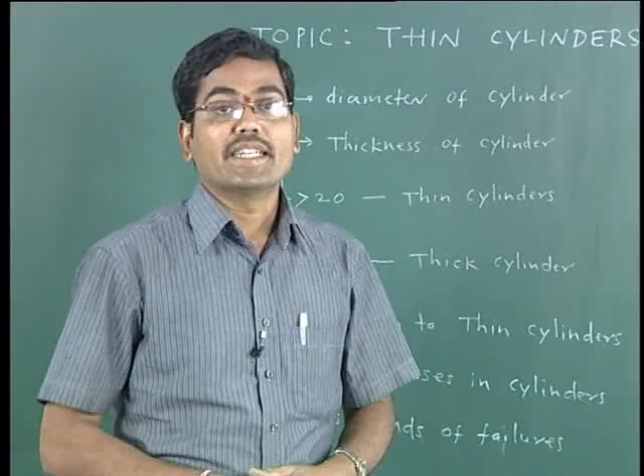Depending upon the ratio between the diameter of the cylinder and the thickness of the cylinder, we can categorize cylinders into two types: thin cylinder and thick cylinder. Suppose D is the diameter of the cylinder and T is the thickness. If the ratio between diameter and thickness is greater than 20, it comes under thin cylinder. If the ratio is less than 20, it is a thick cylinder.

Suppose there is a cylinder having a diameter of 200 mm and a thickness of 5 mm. What is the ratio of D by T? D by T is equal to 200 by 5, which is equal to 40. So here the D by T ratio is greater than 20, so the cylinder with these dimensions comes under thin cylinder.

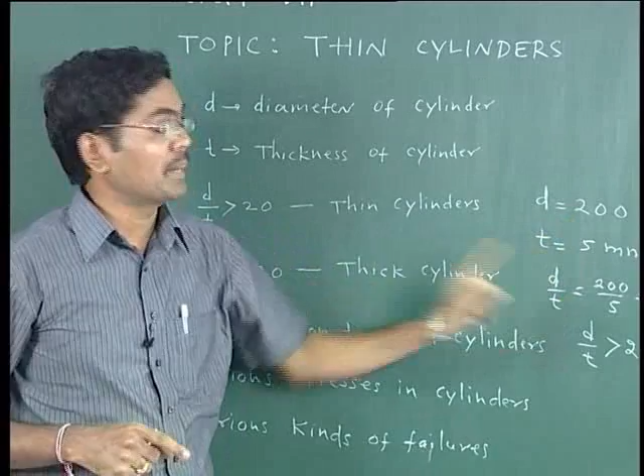Suppose there is a cylinder having diameter 50 mm and thickness 5 mm. What is the D by T ratio? 50 by 5 is equal to 10. Here D by T is not greater than 20, so this cylinder comes under the category thick cylinders. So by knowing the ratio between the diameter and thickness of the cylinder, we can categorize whether it is a thin cylinder or a thick cylinder.

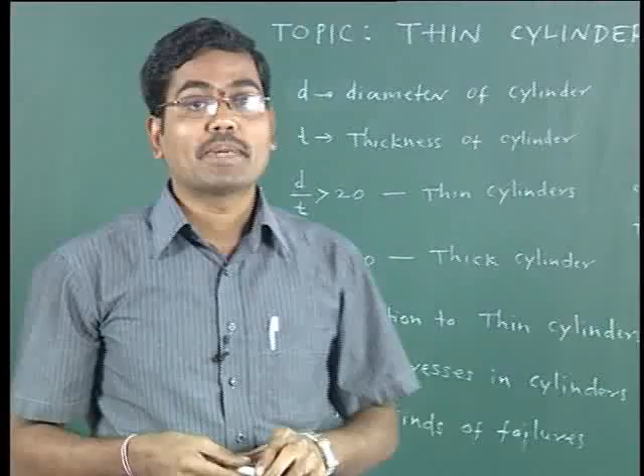So in the present topic, we discuss the introduction and the various stresses in a cylinder, the various kinds of failures, what is principal stress, what is the diametric strain, circumferential strain, longitudinal strain, and volumetric strain.

Suppose this is a cylinder, this is the length of the cylinder and this is the diameter of the cylinder. If you see from there, the front view of the cylinder appears like this, and this is the side view. This is the physical cylinder, how it appears.

Generally we know the applications of a cylinder. Cylinders are generally used for the transportation of fluids, so pressure vessels, diesel drums, water pipes, or gas cylinders come under the category of thin cylinders. Generally the application of a thin cylinder is for storage of fluid under pressure.

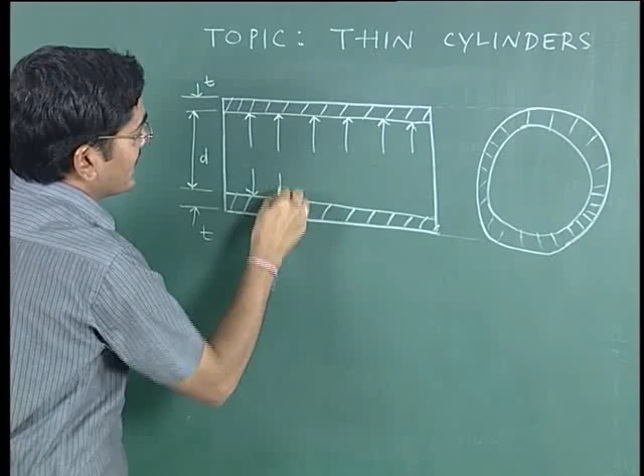So when a fluid is stored under pressure in a thin cylinder, this is the representation of the pressure, P, that is acting in the cylinder. When the cylinder is subjected to internal pressure, some stresses are induced in the thin cylinder. So we will try to determine what are the various types of stresses induced in a thin cylinder and how to design a thin cylinder.

Now let us understand what are the various stresses that are induced in a thin cylinder when subjected to internal pressure. To understand this, first we have to understand the various types of failure that occur in a thin cylinder when subjected to internal fluid pressure.

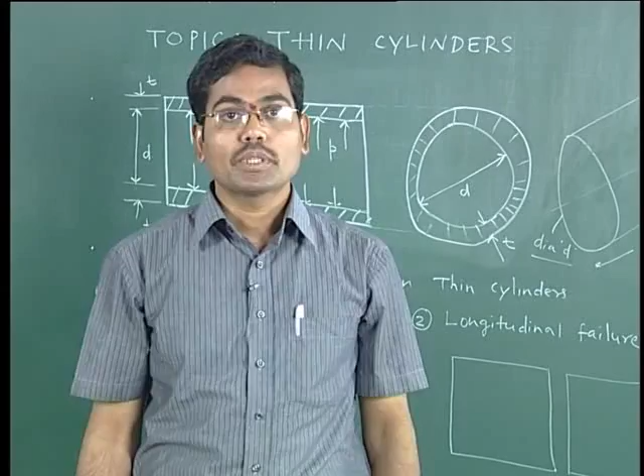Suppose this is a thin cylinder having an internal pressure of P Newton per mm square, with an internal diameter of d mm and a thickness of t mm.

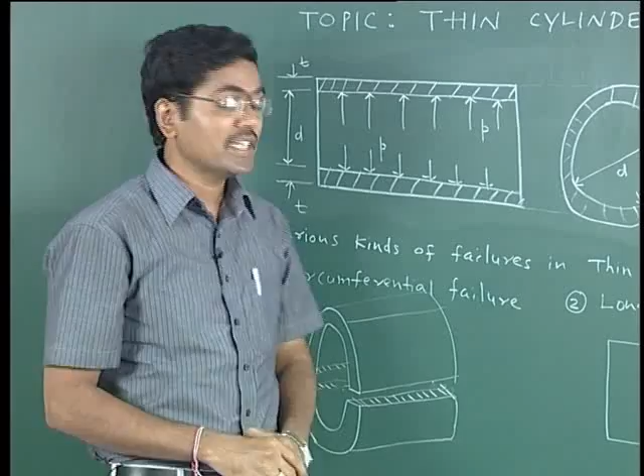When this thin cylinder is subjected to internal pressure, there are two chances of failure. The first is known as circumferential failure and the second is known as longitudinal failure. In circumferential failure, the complete circumference of the thin cylinder will be split into two circumferences.

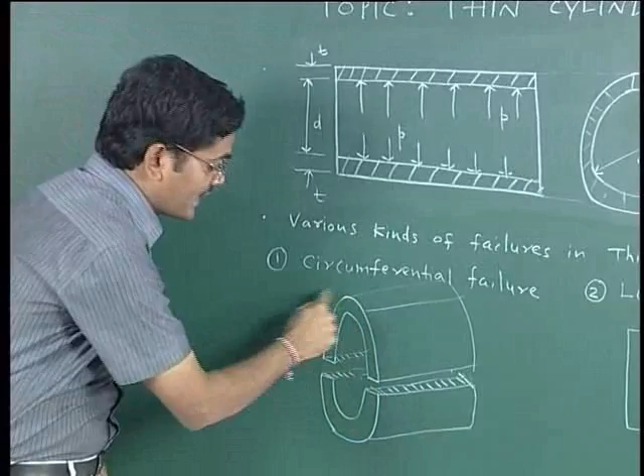Here you see the three-dimensional view of a thin cylinder. When subjected to internal fluid pressure, there may be a chance of failure of this kind. Here, the entire circle is splitting into two halves.

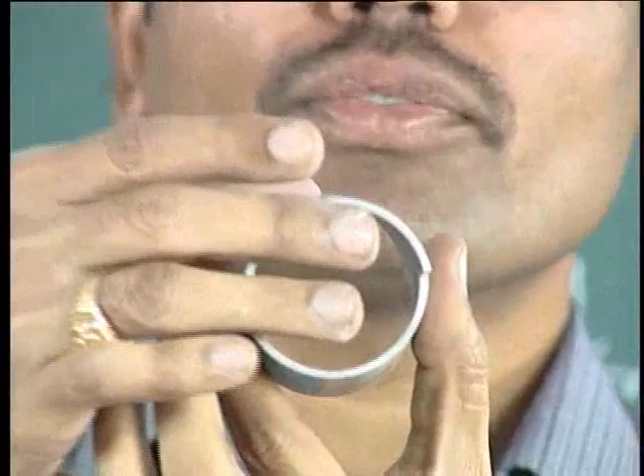Here is a thin cylinder, suppose having certain ends, with fluid passing inside it. When subjected to internal fluid pressure, the cylinder may fail like this. This is the cylinder, and one of the chances of failure is like this.

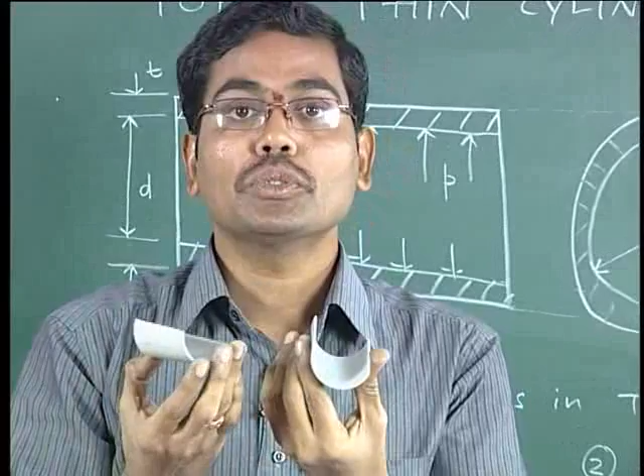So one half will go upside and the other half remains at the bottom. This is what is known as circumferential failure, because the circumference is splitting. One complete circle is becoming two semicircles.

Because of this circumferential failure, the stress induced in a thin cylinder is known as circumferential stress, or it is also known as the hoop stress.

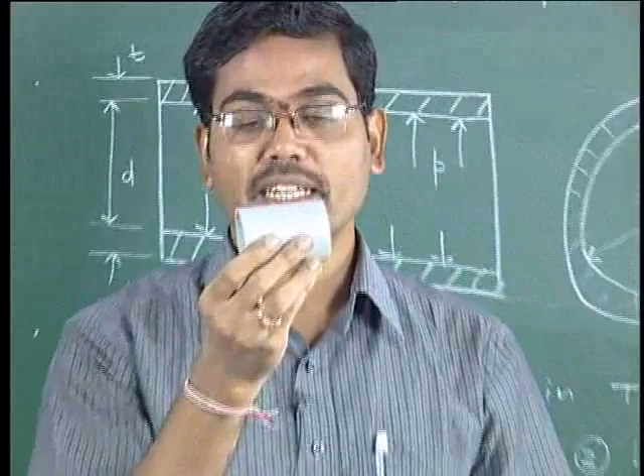The second kind of failure is known as longitudinal failure. In longitudinal failure, suppose this is a cylinder, and when fluid enters into the cylinder, because of the fluid pressure the cylinder may be subjected to a longitudinal failure, and the complete cylinder will become like this.

So along the length direction, along the axis direction, the cylinder will become two smaller cylinders. The single length will become two lengths. This is the failure along the longitudinal direction, which is why it comes under the category of longitudinal failure.

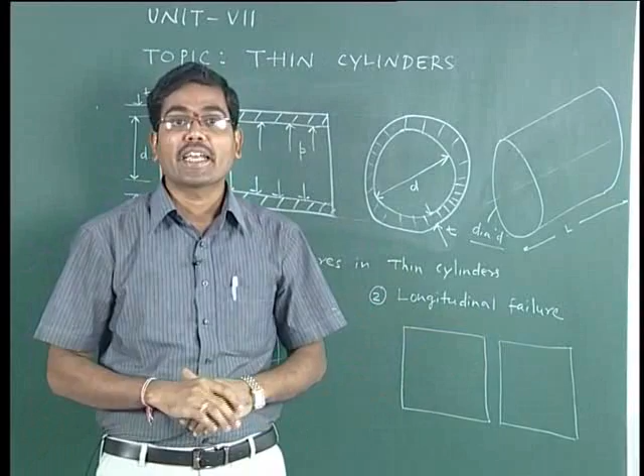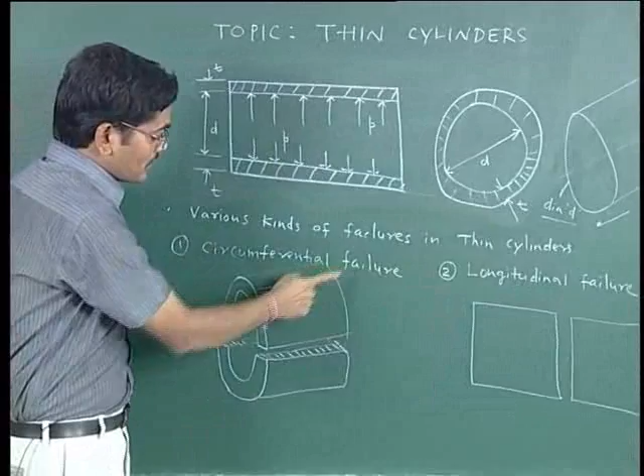The stress induced in a thin cylinder because of longitudinal failure is known as longitudinal stress. So the conclusion is, when a cylinder is subjected to internal fluid pressure, there are two chances of failure: circumferential failure and longitudinal failure. Due to circumferential failure, circumferential stress, also known as hoop stress, is induced. During longitudinal failure, longitudinal stress is induced in the cylinder.

Let us try to derive the magnitude of this circumferential stress when a cylinder of diameter d, thickness t, is subjected to an internal fluid pressure of P.

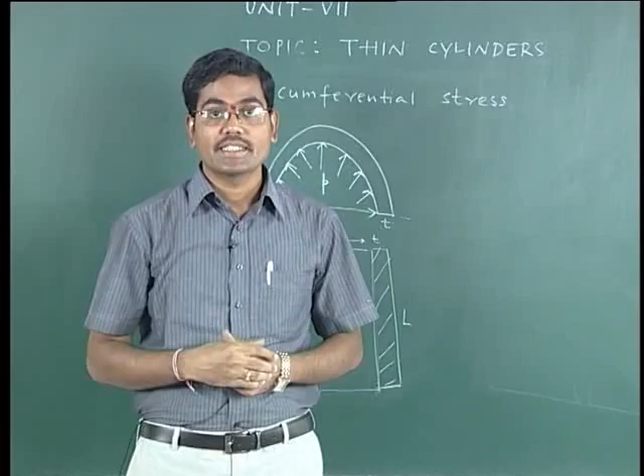Now let us understand the magnitude of circumferential stress in a thin cylinder when subjected to internal pressure. Here you see the way of circumferential failure in a thin cylinder, with pressure P, diameter d, and thickness t. This is the top view, and let's say this is the front view.

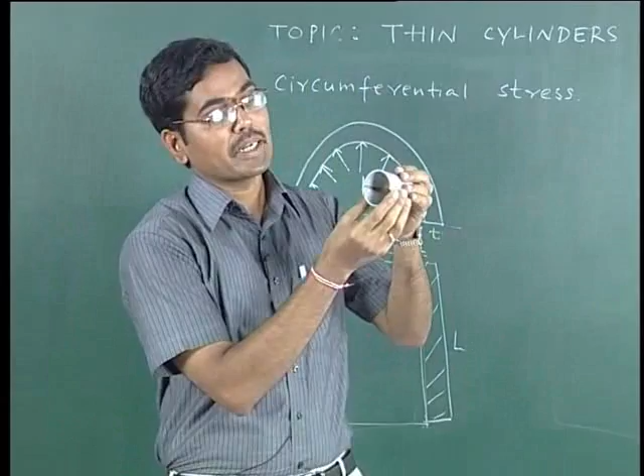During the circumferential failure, this particular circumference will become two halves. Consider only half of the section. This is half of the cylinder, or one trough.

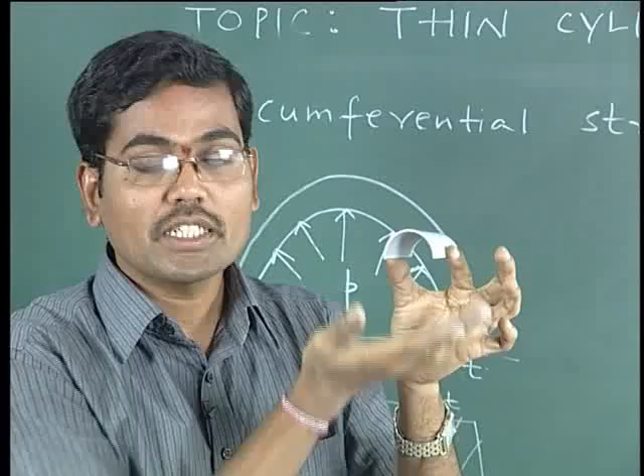So what is the load acting on this cylinder? Suppose this pressure P is acting inside the cylinder, as represented here. Because of the action of the internal pressure, the load, or the separating force, or the bursting force, acting on the cylinder is this pressure multiplied by this particular area.

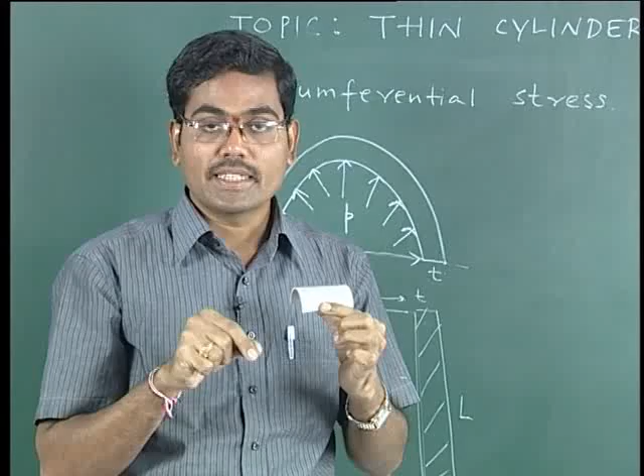This area represents the projection area of the semicircle. So when the semicircle is projected, generally the area on which the pressure is acting is D into L. So D into L is the projected area on which the pressure is acting. So when pressure is multiplied by this projecting area, this is what is the load that is acting on the thin cylinder.

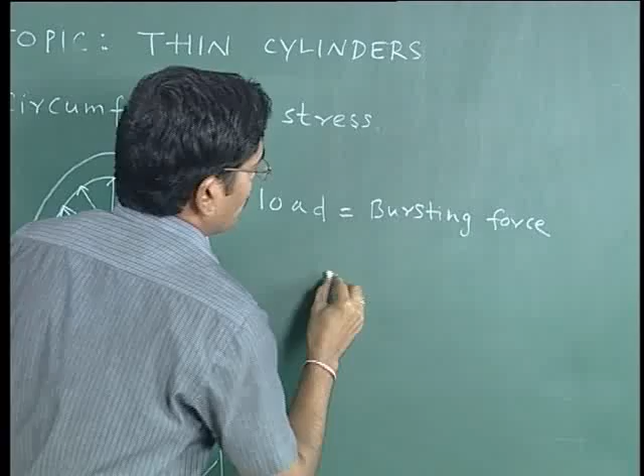This is the bursting force that is separating a thin cylinder into two halves, which is the pressure multiplied by this particular area. So we can write the bursting force or the load is equal to the pressure multiplied by the projected area. What is this area? D into L, where D is the diameter and L is the length. So this is the bursting force that is separating the thin cylinder into two halves.

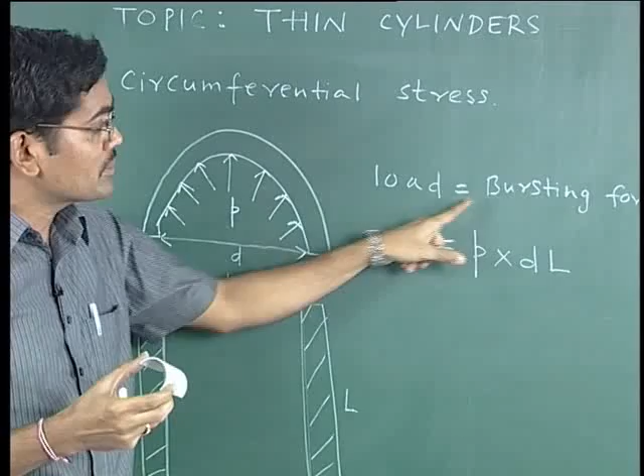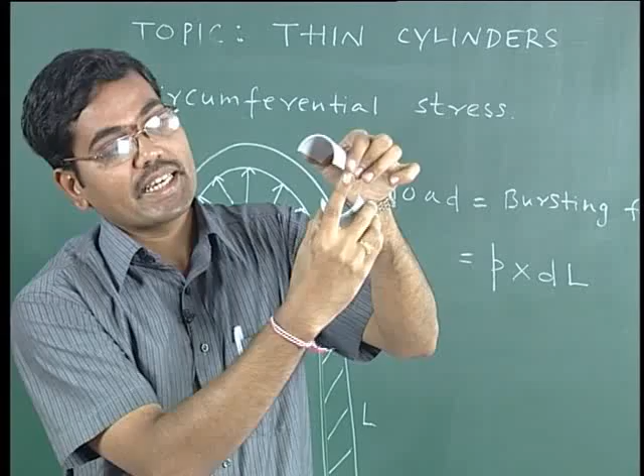So to resist this bursting force or to carry this load, what is the resistance force that is developed in a thin cylinder? During the failure, generally this is one of the areas that is subjected to the failure, as well as this other area. So to carry this particular load, generally the resistance force is developed along this area as well as along this area. So the circumferential stress is also induced in the thin cylinder.

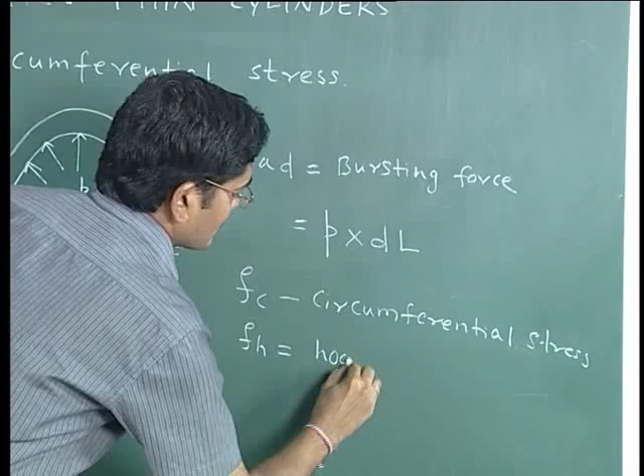So let us suppose FC is the circumferential stress that is induced in the thin cylinder, circumferential stress, or sometimes also referred as FH. FH is equal to hoop stress. So hoop stress or circumferential stress, both are same. So the hoop stress is induced in this particular cross section.

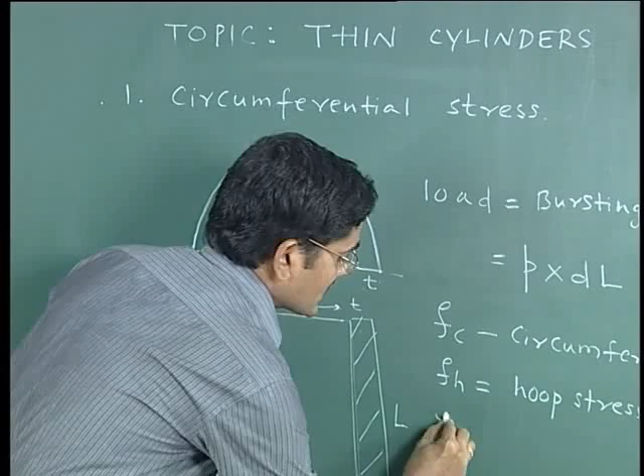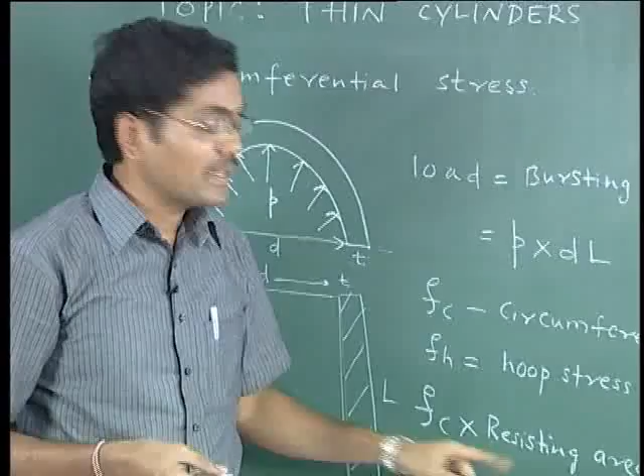So when this stress is multiplied by the resisting area, that will give you the resisting force to carry this bursting force, so that the cylinder may not be subjected to the circumferential failure. So if this circumferential stress is multiplied by the resisting area, it will give you the resistance offered by the cylinder. This is the load on the cylinder, P into DL, and this FC multiplied by the resisting area will give you the resistance induced in the cylinder.

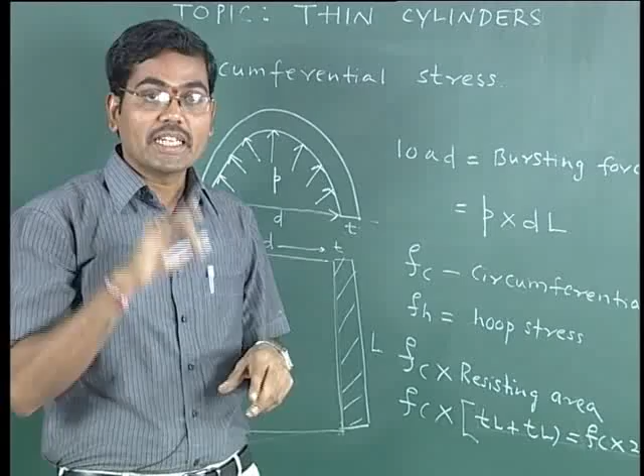So here the resisting area is this area plus this area. This area is T into L and this area is T into L. So FC is multiplied by T into L plus T into L, so FC into 2 into T into L. So here we have seen that P into DL is the bursting force that is acting on the cylinder, so that it will be subjected to the circumferential failure.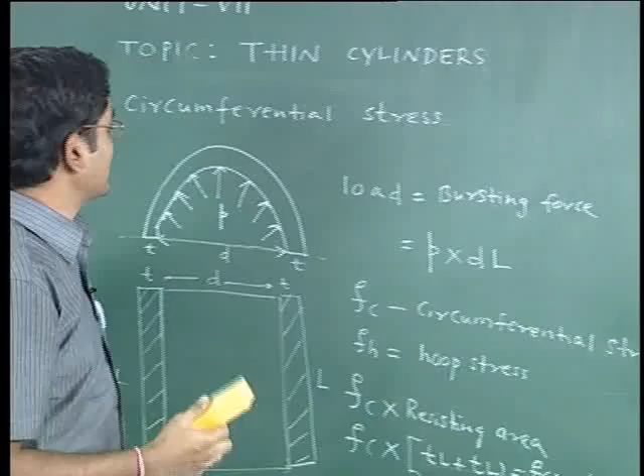To avoid the circumferential failure, the resistance or the resisting force developed within the thin cylinder is FC multiplied by 2TL. So if you equate the bursting force with the resistance offered by the thin cylinder along its walls, that will give you the magnitude of the circumferential stress. So now let us equate the two expressions: the bursting force is equal to the resistance offered by the resisting force.

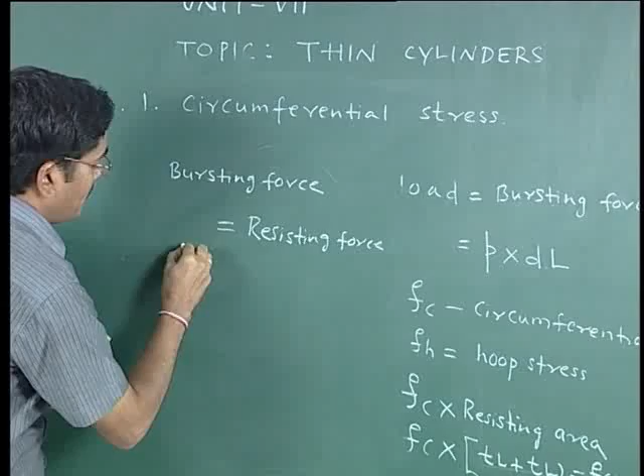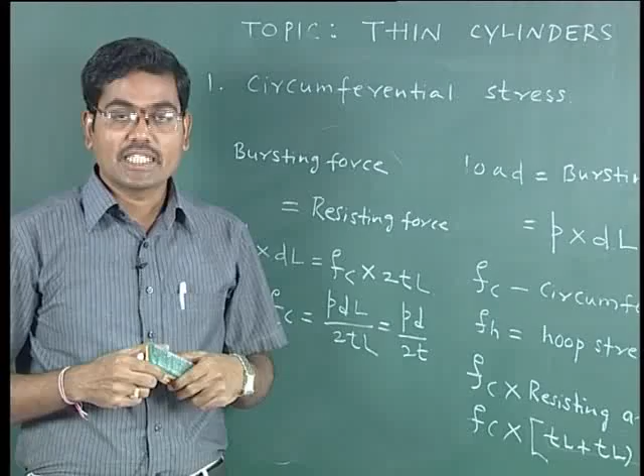So bursting force is P into D into L, and resisting force is FC, the circumferential stress, multiplied by 2 into T into L. So from this, what is circumferential stress? P into D into L divided by 2 into T into L. It will give you P into D by 2 into T. So this expression, P into D by 2 into T, will give you the magnitude of the circumferential stress, also known as the hoop stress induced in a thin cylinder when subjected to internal fluid pressure of magnitude P Newton per mm square.

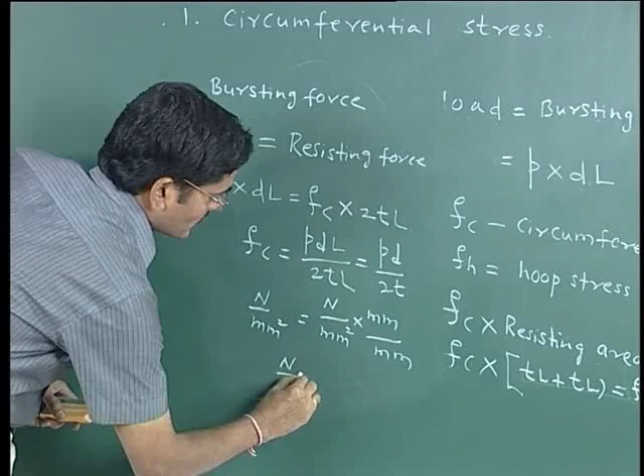So you can also tally the units. Fc is in Newton per mm square, that is equal to pressure in Newton per mm square, and diameter is in mm, and thickness is in mm. So it will give you Newton per mm square is equal to Newton per mm square. This is what is the circumferential stress or the hoop stress that is induced in a thin cylinder.

So we have just derived this by equating the bursting force acting on the two walls and the resisting force offered by the two walls.

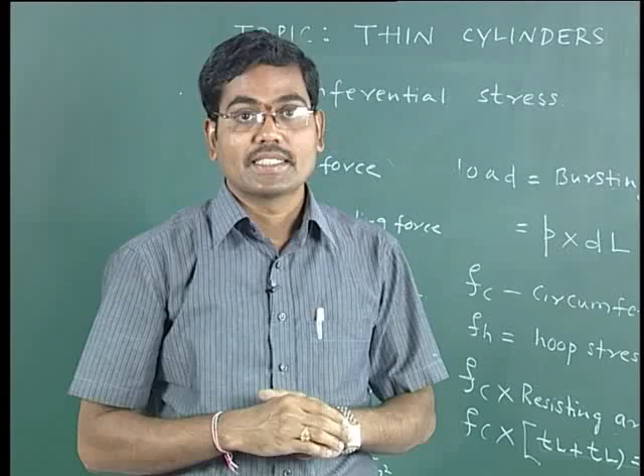Now let us understand what is the magnitude of the longitudinal stress when a thin cylinder is subjected to internal fluid pressure. Earlier we have seen what is a longitudinal failure.

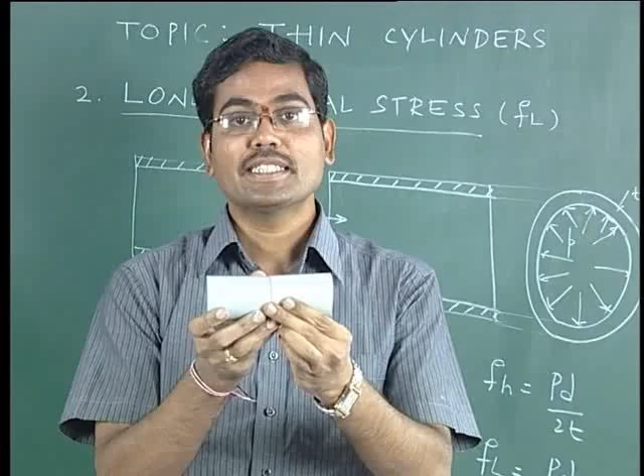Suppose this is a thin cylinder subjected to internal fluid pressure. When this thin cylinder is subjected to internal fluid pressure, the chances of failure may be that a single cylinder will be split into two small cylinders along its length. This is what is known as longitudinal failure. In the beginning, the cylinder will be like this with no breakage, but once the fluid enters with internal pressure, the cylinder will become like this.

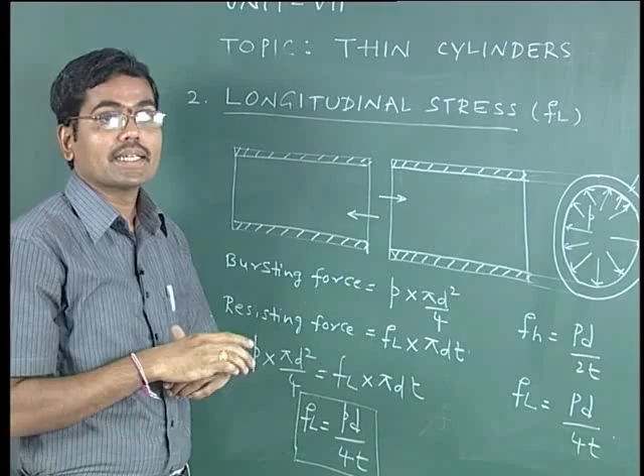Now let us understand what is the longitudinal stress. So that longitudinal failure is represented here in two dimensions. This is a small cylinder and this is the second part of the cylinder. During the longitudinal failure, this cylinder will move like this and the remaining half will move in the left direction. Then what is the bursting force that is separating a single cylinder into two small cylinders? If you see the side view of this...

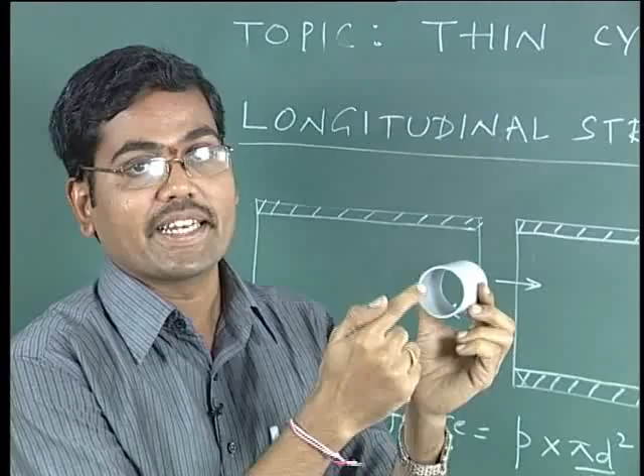The fluid that is here is trying to burst or separate this part into some other direction. Suppose this is the fluid pressure that is existing. The pressure is acting on this particular area. When the cylinder is moving in this direction, the internal fluid with certain pressure is inducing some force over this particular area. So when pressure is multiplied with this particular cross-sectional area, that will give you the separating force or the bursting force that is separating the two cylinders.

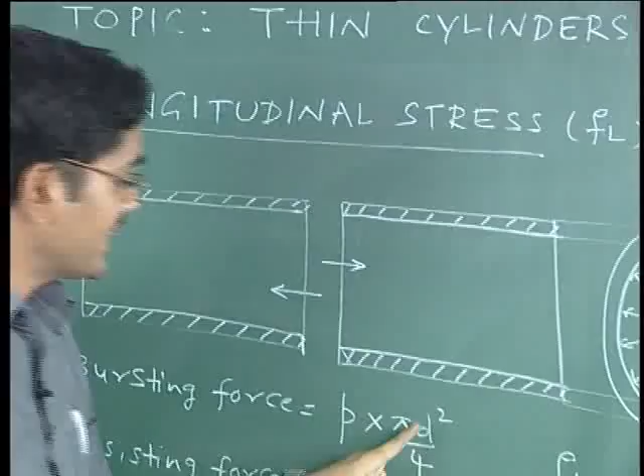If you multiply the pressure with this cross-sectional area, so if d is the diameter of the cylinder, pi d square by 4 will give you this cross-sectional area. So when P is multiplied with pi d square by 4, that will give you the bursting force or separating force or the load on the cylinder for the cause of longitudinal failure.

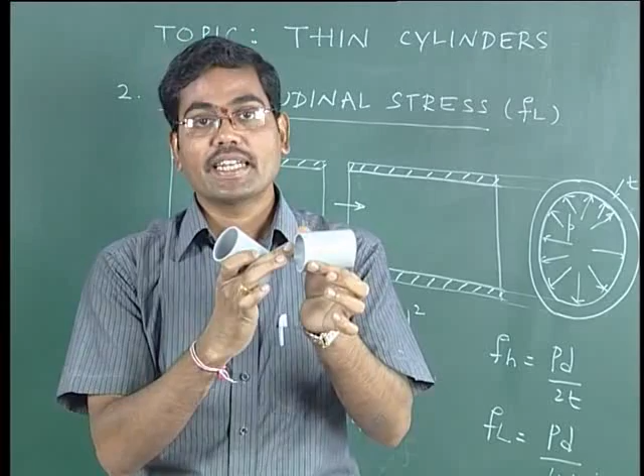So to carry this particular load, the resistance force is developed in the thin cylinder. Generally, if you observe what is the resisting area during the longitudinal failure, which part of the cylinder is subject to the failure? Only this wall part. So whatever resistance develops in the thin cylinder is only at this particular area. This is the area where the longitudinal stress is induced.

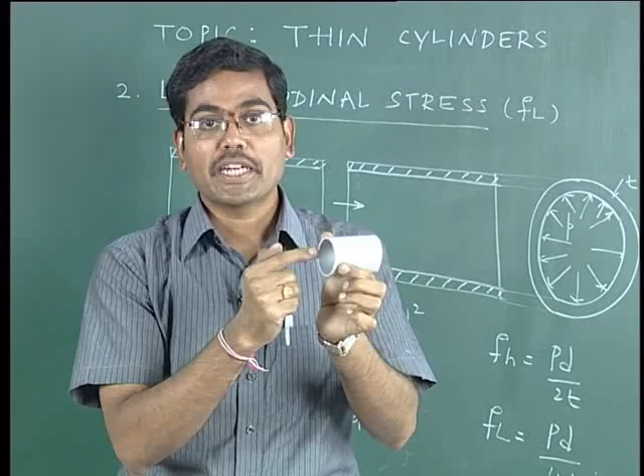When the longitudinal stress is multiplied with this particular area, suppose d is the diameter of the cylinder, as thickness is very very small, I can make this d as the mean diameter of this particular portion. So what is this resisting area? Pi into d, that is the perimeter, multiplied by thickness. Pi into d into t will give you the resisting area. And when this resisting area is multiplied with the longitudinal stress, that will give you the resistance or the resisting force offered by the thin cylinder to avoid longitudinal failure.

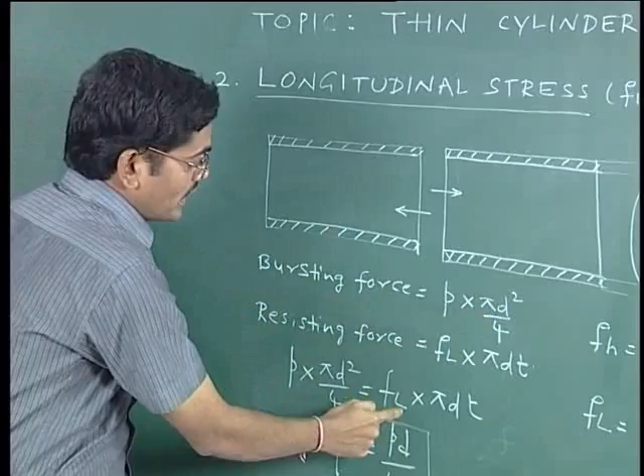So basically this expression will give you the bursting force which makes the cylinder separate along the longitudinal direction, and this particular expression will give you the resisting force which will stop the longitudinal failure. So if you equate this bursting force with the resisting force, P into pi d square by 4 is equal to Fl into pi dt. This gives Fl is equal to P into d by 4 into t. This will give you the magnitude of the longitudinal stress that is developed in a thin cylinder.

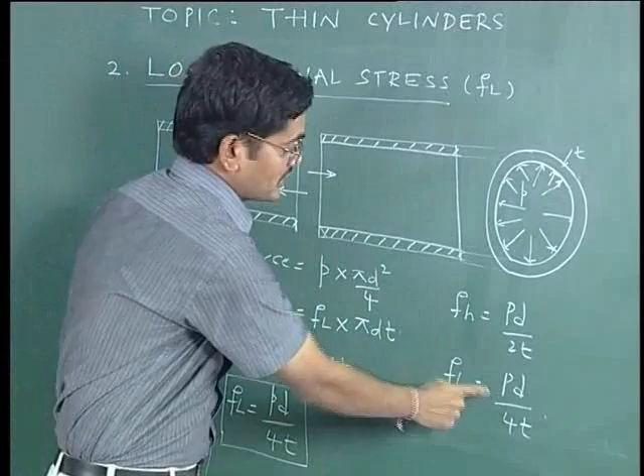So totally we have seen what is the magnitude of the hoop stress and what is the magnitude of the longitudinal stress. The expression is Pd by 2t for hoop stress, and for the longitudinal stress Fl is equal to Pd by 4t. Now let us understand what is circumferential strain and what is longitudinal strain.

Generally, if you observe, during the circumferential failure, the single cylinder will become two troughs. During the circumferential failure, in general, what happens is the circumference of the cylinder will be increased and the length of the cylinder will be decreased. The circumference of the cylinder increasing means the diameter of the cylinder will be increased and the length of the cylinder will be decreased.

This is what happens when the cylinder is subjected to the circumferential stress. During the longitudinal failure, the length of the cylinder will be increased and the diameter of the cylinder will be decreased.

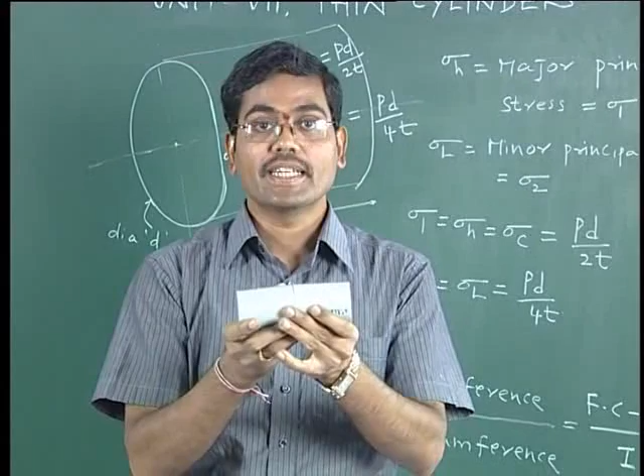Generally, we are interested in what is the increase in the diameter of the cylinder and what is the increase in the length of the cylinder when the cylinder is subjected to internal fluid pressure. Let us try to understand how to get the derivations for the change in diameter of the cylinder, for the change in length of the cylinder.

This is the representation of the two stresses on a cylinder. Earlier we have derived the hoop stress, also known as the circumferential stress, that is equal to Pd by 2t. Similarly, the longitudinal stress is equal to Pd by 4t.

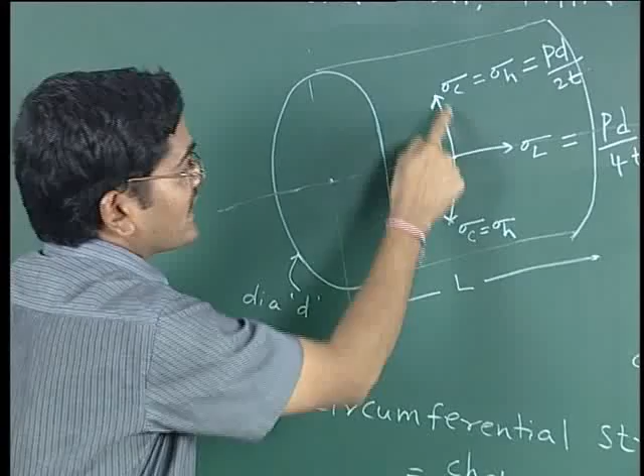If you represent these two stresses on a three-dimensional view of a cylinder, generally the direction of the hoop stress is along the circumference. This direction will go along the circumference, so the circumference will be increased and there will be a failure. That is the circumferential stress.

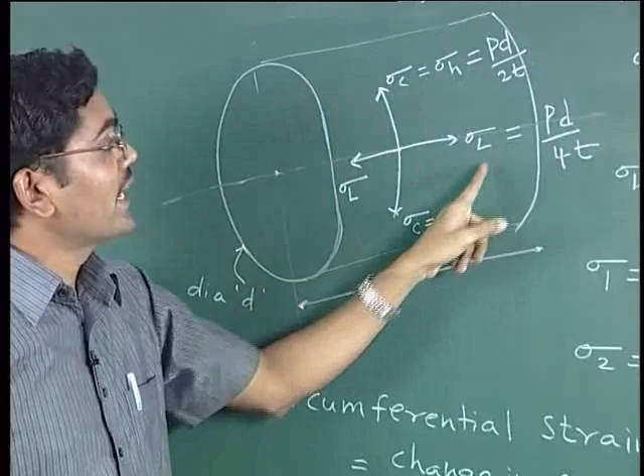This, known as the longitudinal stress, will be parallel to the length, and this direction is longitudinal. This will make the cylinder split into two parts along the length. So, during the circumferential failure, sigma c will increase the diameter, and during the longitudinal failure, sigma L will increase the length of the cylinder.

Now this stress, known as the hoop stress, is also known as the major principal stress. Generally, principal stress is the maximum normal stress on a plane on which the shear stress is zero. Here in thin cylinders, this hoop stress, or circumferential stress, is treated as the major principal stress on the thin cylinder.

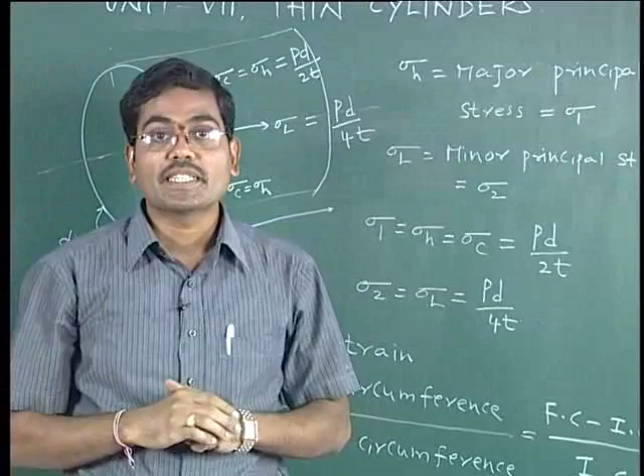That is referred by the letter sigma 1. And sigma L, the longitudinal stress, is referred as the minimum or minor principal stress, referred by the letter sigma 2. So sigma 1, the major principal stress, is equal to sigma h equal to sigma c, equal to Pd by 2t. And sigma 2, the minor principal stress, is equal to Pd by 4t.

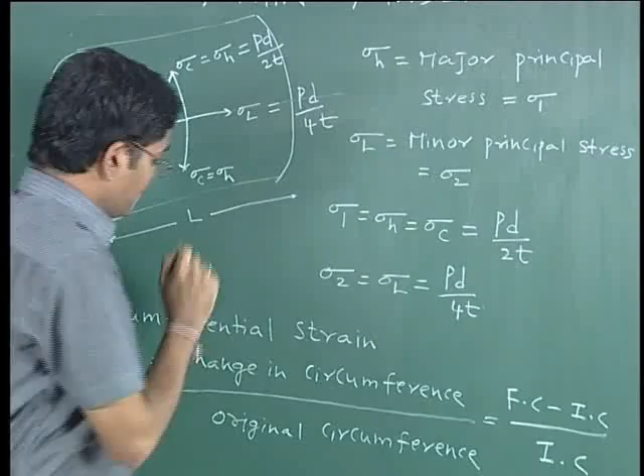Now let us try to understand the circumferential strain. From the basic definition, strain is deformation per unit length, or strain is equal to change in length divided by original length. As it is circumferential strain, the definition is the change in circumference divided by the original circumference. So how to get the change in circumference?

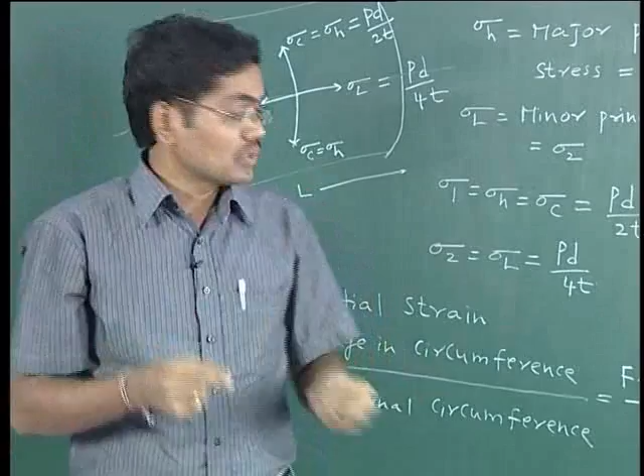We know that the circumference will be increased. So it is the final circumference minus initial circumference divided by initial circumference, or you can write final circumference minus original circumference divided by original circumference. Now let us understand the term circumferential strain.

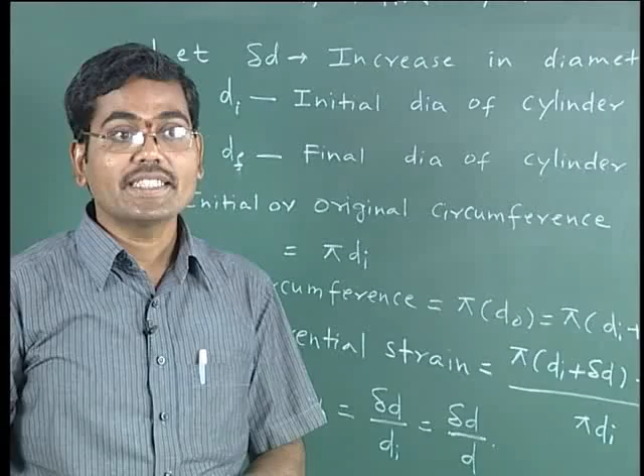We try to understand what is the increase in the diameter of a cylinder when it is subjected to internal fluid pressure. The expression for circumferential strain is the change in circumference to the original circumference. Let us suppose there is a cylinder having the original diameter di, and when subjected to internal fluid pressure, delta d is the increase in diameter, and df is the final diameter of the cylinder.

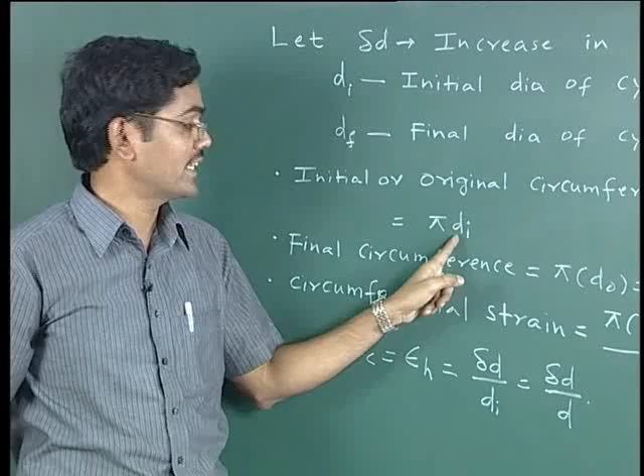Here you see the initial or original circumference is equal to pi into di, where di is the initial diameter of the cylinder. Final circumference is equal to pi into d naught, where d naught is the final diameter. D naught is equal to df, both are the same - it is the final diameter, df. So I can write final diameter is equal to initial diameter plus the change in diameter.

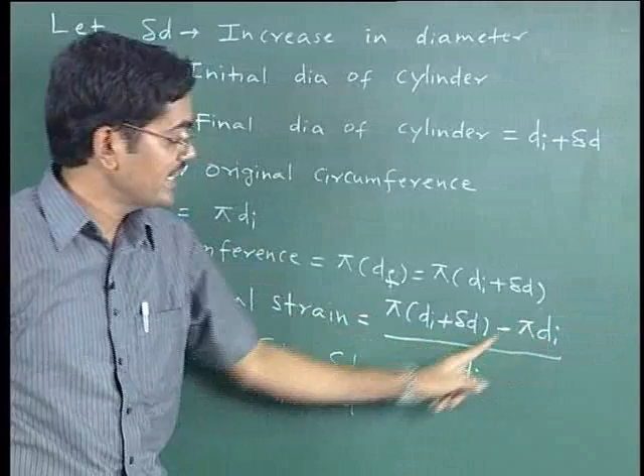Now circumferential strain is equal to final circumference minus initial circumference divided by initial circumference. So from this expression: pi into di plus pi delta d, minus pi into di, divided by pi into di. This pi into di will be cancelled, and the remaining term is pi into delta d by pi into di. This will give you delta d by di, where di is the diameter.

So the circumferential strain, generally referred by the letter epsilon c, is equal to epsilon h, is equal to delta d by d. Now let us understand what is longitudinal strain and what is volumetric strain.

Suppose that there is a cylinder having dia d and length L. When the cylinder is subjected to the internal fluid pressure, the diameter will be increased as well as the length will be increased. So what is the increase in the dia that we have seen in the circumferential strain? Circumferential strain is equal to delta d by d.

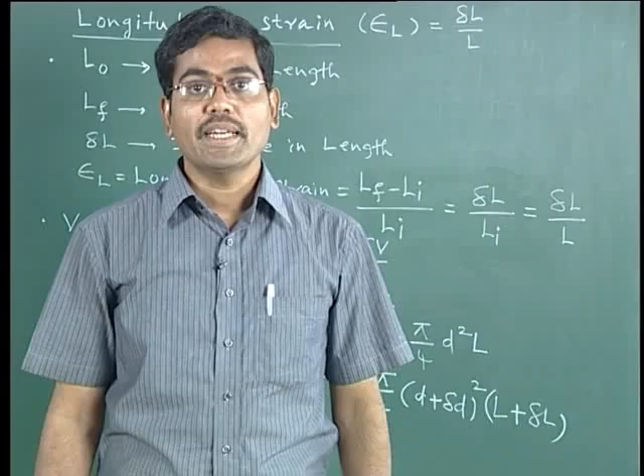Similarly, here longitudinal strain, represented by the letter epsilon L or EL, is equal to the change in the length of the cylinder divided by the original length of the cylinder. Let us suppose L0 is the original length of the cylinder, LF is the final length of the cylinder, and delta L is the increase in the length of the cylinder.

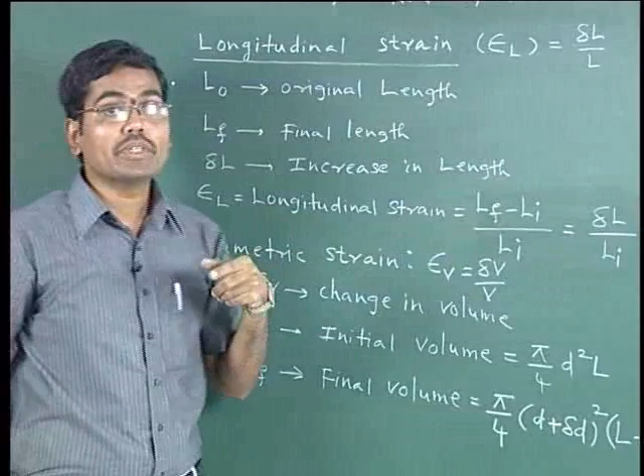Epsilon L, the longitudinal strain, is equal to the final length minus initial length divided by initial length. So final length minus initial length is equal to the change in the length, that is divided by original length or the initial length. So this delta L by L will give you the longitudinal strain that is developed in a thin cylinder.

Similarly, we discuss the volumetric strain. In the volumetric strain, initially generally the original dia is d and original length is L. But when the cylinder is subjected to the internal fluid pressure, this d will become d plus delta d, and L will become L plus delta L. So the final volume of the cylinder will be more than the initial volume. So there is a change in the volume of the cylinder. This change in the volume of the cylinder can be expressed by means of volumetric strain.

So the definition of the volumetric strain is: volumetric strain epsilon V is equal to the change in the volume divided by the original volume. Suppose that delta V is the change in the volume of the cylinder and Vi is the initial volume of the cylinder.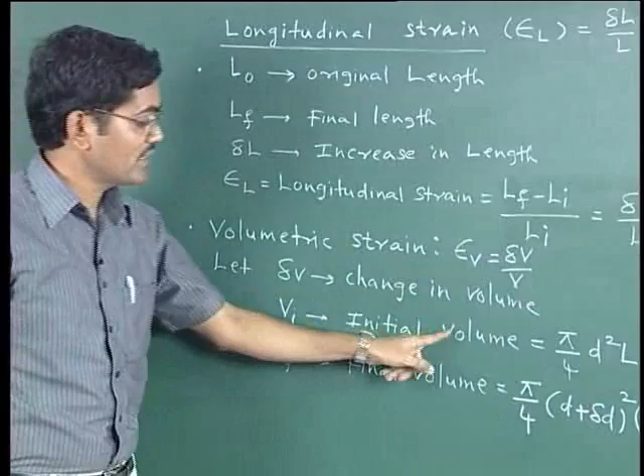Suppose that the cylinder has dia D and L is the length of the cylinder. So this is the dia D and this is the length L. Then this volume is equal to its cross sectional area multiplied by length. So pi d square by 4 is the cross sectional area, multiplied by the length, that will give you the initial volume of the cylinder.

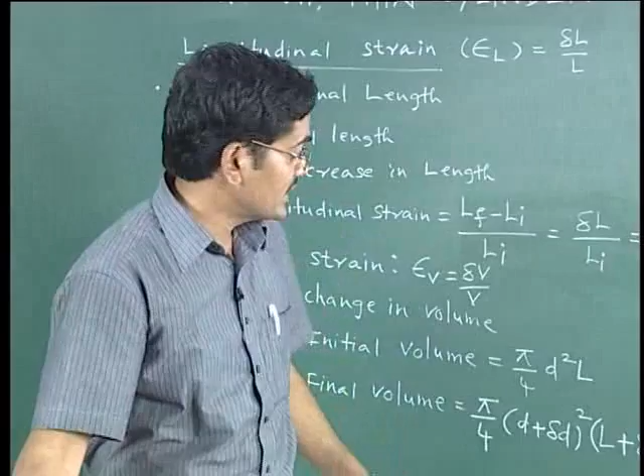When this D becomes D plus delta D and L becomes L plus delta L, then the final volume of the cylinder is equal to pi by 4 into D plus delta D whole square into L plus delta L. So by knowing the final volume of the cylinder and by knowing the original volume of the cylinder, we can calculate the volumetric strain of a cylinder in terms of D and L.

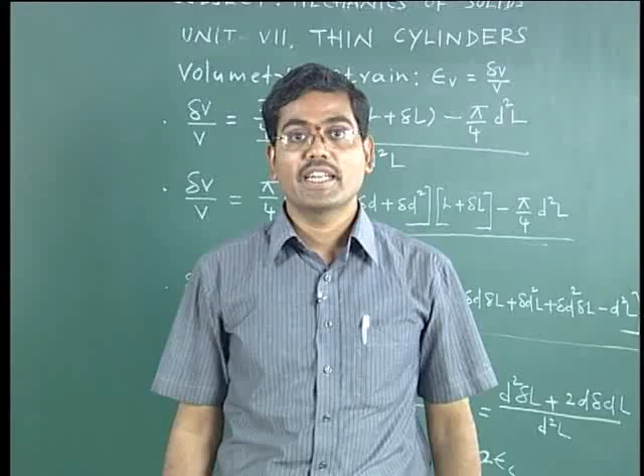Now let us derive the expression for volumetric strain of a thin cylinder. Let us suppose that there is a thin cylinder. The initial diameter of the cylinder is D and the initial length of the cylinder is L, and the cylinder is subjected to an internal pressure of P Newton per mm square.

When this thin cylinder is subjected to internal pressure, generally the length of the cylinder will be increased and the diameter of the cylinder will be increased. We suppose that delta D is the increase in the diameter of the cylinder and delta L is the increase in the length of the cylinder. So the final diameter of the cylinder will be equal to D plus delta D and the final length of the cylinder will be equal to L plus delta L.

So from the expression for volumetric strain, the expression for volumetric strain is equal to the change in the volume to the original volume. But what is the change in the volume? Change in the volume is equal to the final volume minus the initial volume. So the expression change in volume by original volume is equal to the final volume minus the initial volume divided by the initial volume. Here what is the expression for the final volume?

Pi by 4 into final dia whole square into final length.

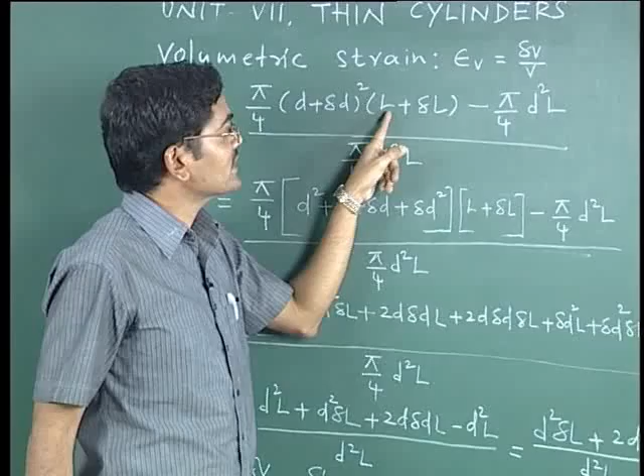So pi by 4, D plus delta D whole square is the final diameter, this is the final length L plus delta L, minus the initial volume pi by 4 into the initial diameter and initial length. Delta V by V, that is volumetric strain, equals pi by 4, and if you open the brackets, D plus delta D whole square becomes D square plus 2 into D into delta D plus delta D whole square.

This is multiplied by L plus delta L, minus pi by 4 into D square L, divided by pi by 4 into D square L. Now delta V by V equals pi by 4 into D square into L, plus D square into delta L, plus 2D delta D into L, plus 2D delta D into delta L, plus delta D square into L, plus delta D square into delta L, minus D square into L. This pi by 4 is taken common, and the remaining term in the denominator is D square into L.

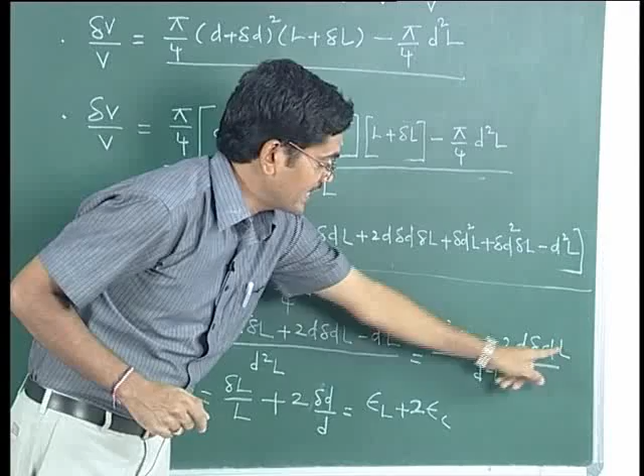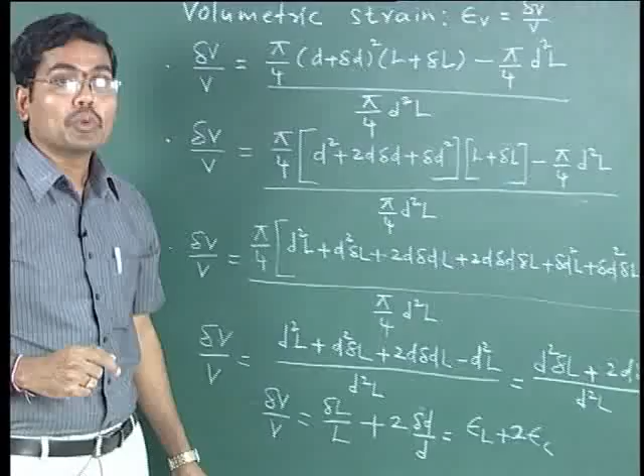D square is cancelled, delta L by L remains, plus 2 into D into delta D L by D square L, that is equal to 2 into delta D by D. But we know that delta L by L is the longitudinal strain, epsilon L, plus 2 into delta D by D, the circumferential strain or hoop strain. So the volumetric strain equals the longitudinal strain, delta L by L, plus 2 into the circumferential strain, delta D by D.

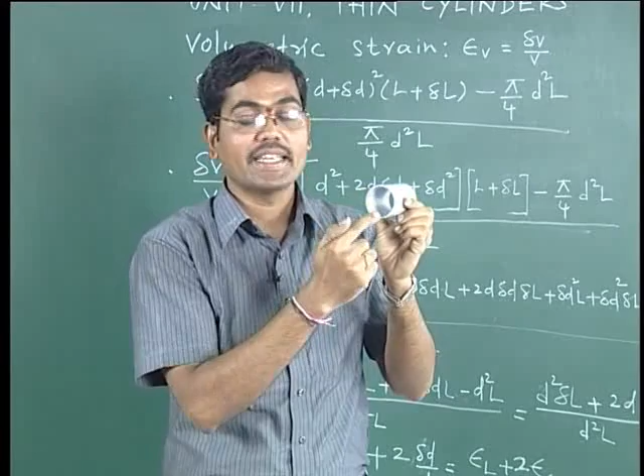If you observe the cylinder dimensions, generally the three dimensions of the cylinder are along its x-axis, y-axis and z-axis. Suppose this is a cylinder, the dimension along the x-axis is D, the dimension along the y-axis is D, and the dimension along the z-axis is L. The volumetric strain, from the basic formula, equals the strain in the x direction, that is delta D by D, plus the strain in the y direction, again delta D by D, plus the strain in the z direction, delta L by L. So from the basic dimensions also, by knowing the three dimensions of a cylinder, the volumetric strain equals delta D by D plus delta D by D plus delta L by L.

We can also write the volumetric strain equals 2 into delta D by D plus delta L by L, that is volumetric strain equals longitudinal strain plus 2 into circumferential strain. It is easy to remember: the volumetric strain of a cylinder equals delta D by D plus delta D by D plus delta L by L, which equals 2 into delta D by D plus delta L by L, that is volumetric strain equals 2 into circumferential strain, 2 into epsilon c, plus longitudinal strain, epsilon l.

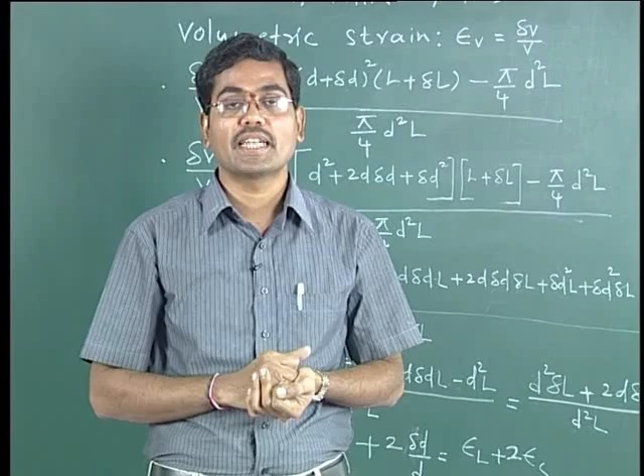Delta v by v is equal to 2 into epsilon c plus epsilon l. We have expressed the volumetric strain in terms of circumferential strain and longitudinal strain, and also in terms of delta d and delta l. We have seen that epsilon v is equal to 2 into epsilon c plus epsilon l, and also equal to 2 into delta d by d plus delta l by l. Now let us express the volumetric strain, hoop strain and longitudinal strain in terms of

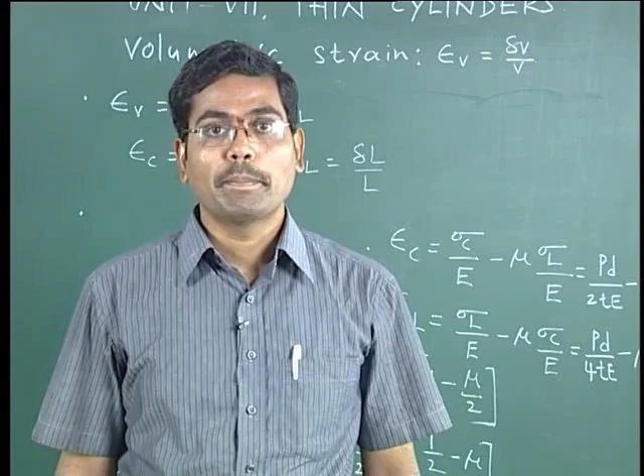pressure, diameter, thickness and modulus of elasticity of the cylinder material. That is epsilon v is equal to 2 into epsilon c plus epsilon l, where epsilon c is the circumferential strain delta d by d and epsilon l is the longitudinal strain delta l by l. Now let us try to express these strains in terms of P, D, T and E.

If you observe a thin cylinder with internal fluid pressure, at any point on the circumference, inner face, mid surface or outer surface, each point is subjected to two kinds of stresses: the hoop stress and the longitudinal stress. Here is a point on the surface of the cylinder, subjected to hoop stress or circumferential stress in the direction of the circumference, and longitudinal stress along the length of the cylinder.

Now let us represent the circumferential strain in terms of circumferential stress and longitudinal stress. Generally, the circumferential stress will try to increase the diameter of the cylinder, whereas the longitudinal stress will try to reduce it. Suppose sigma c will help increase delta d and sigma L will reduce delta d.

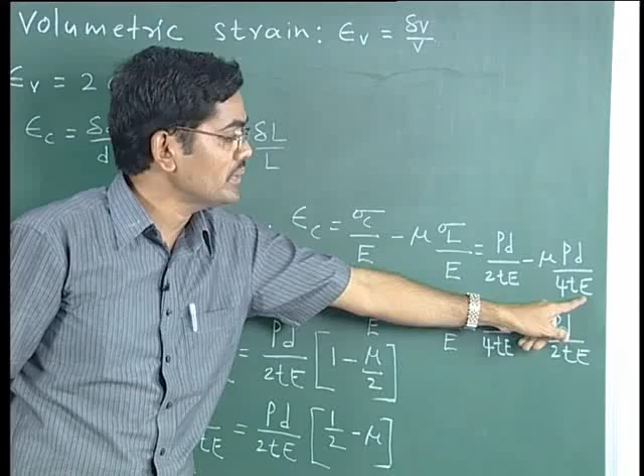But what is circumferential stress? PD by 2T, divided by E, minus mu into longitudinal stress, which is PD by 4T, into E. So this is the representation of the circumferential strain in terms of pressure, diameter, thickness and modulus of elasticity.

Similarly, the longitudinal strain, or the strain along the length direction, is equal to longitudinal stress divided by E minus mu into circumferential stress divided by E. What is longitudinal stress? PD by 4T into E, minus mu into circumferential stress, PD by 2T into E.

So from this, circumferential strain can be written by taking PD by 2TE as a common term in both terms, giving 1 minus mu by 2. So it becomes PD by 2TE times 1 minus mu by 2. Similarly, the longitudinal strain is equal to PD by 4TE minus mu into PD by 2TE. Taking PD by 2TE common, the remaining term is 1 by 2 minus mu, which gives the expression for the longitudinal strain.

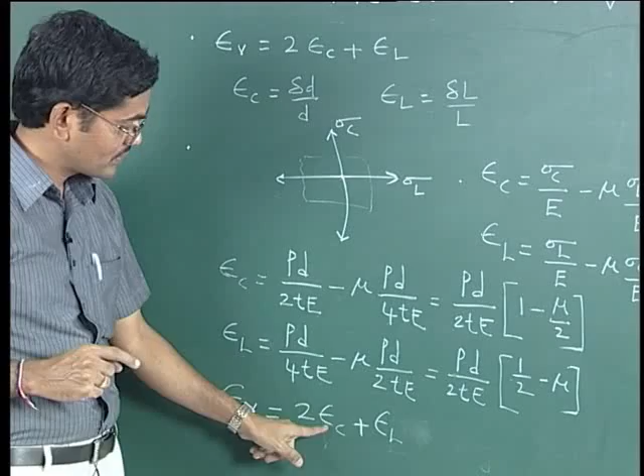We already learned that volumetric strain is equal to 2 into circumferential strain plus longitudinal strain. So you just substitute the expression for the circumferential strain and the expression for the longitudinal strain, and you will get the volumetric strain in terms of P, D, T and E.